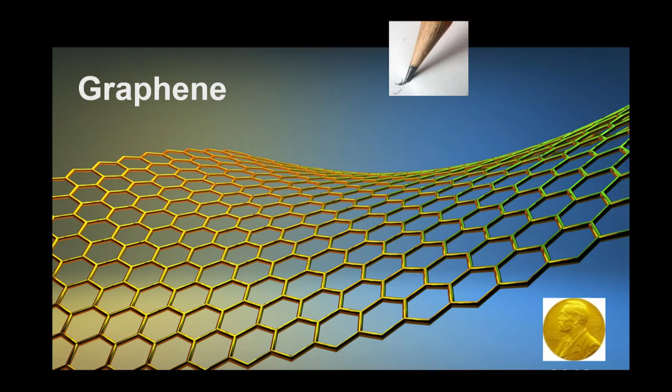So this, if you're a nano person, immediately brings up a question. What does this look like? How small could you get? If you scale everything down, how small is it possible to go in this kind of approach? The answer is, of course, set by the size of atoms. If you scale down to the smallest sheet of paper you can imagine, you would have, say, a sheet of graphene. And recently, there's been a great deal of excitement in doing all kinds of fun stuff with graphene.

It's a very interesting electronic material. It's an optical material, you name it. But it's also just a really robust, nice one-atom thick sheet of paper out of which you can imagine doing the smallest kind of paper arts possible.

And I should also mention that graphene doesn't come in just one flavor. There's a bunch of 2D materials being developed, all of them very old materials being made new again by being explored in single sheet form, all the way from single atomic layer sheets of glass to semiconductors and insulators, and now people are even doing vertical and lateral heterostructures of these materials, making 2D sheets that mix materials, layering them on top of each other.

If you think about this from a paper arts point of view, there are lots of things that you could imagine doing. And so the question becomes, can we do this? Can we do some sort of paper art type three-dimensional structures starting from this two-dimensional material? So that's the question that we've been asking ourselves in my group. We will not fold this for you by the end of this talk, so don't expect it. But we are making a little bit of progress, and I'm going to tell you about that progress.

So first off, you have to understand your starting material. And the first key question is how stiff is it? If I bend it, how bendy is it? Because basically the reason we want to shrink the paper in the Z dimension and make it 1 atom thick is because it needs to stay nice and flexible even when it's extremely small. So how do we answer this question?

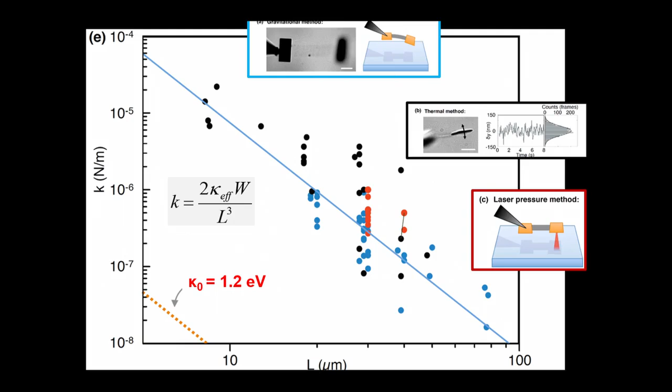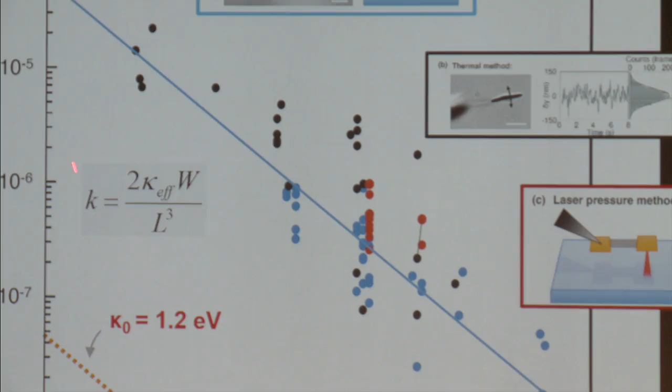Anyway, if we accept we're going to work in water, we can measure, for example, the bending stiffness of these graphene sheets. And this is the spring constant of this graphene sheet. It's a function of how long the graphene sheet is. You don't need to pay a whole lot of attention to this graph other than, number one, we took a whole bunch of data using a whole bunch of techniques. And number two, this is what we got, and this is what we thought we were going to get. And finally, this is a log scale, so we didn't miss by a little. We missed by about 3 orders of magnitude in how stiff the graphene was in comparison to what we thought.

And the answer is it was a lot stiffer than what an atomic scale person would have told you. People know a lot about carbon-carbon bonds. A chemist could tell you what the stiffness for bending carbon-carbon bonds is, but our paper came in about 1,000 to 10,000 times stiffer than what people thought. And so, why is that? It turns out the answer is incredibly simple.

There's the answer. A crumpled sheet is much, much stiffer than a flat sheet. So we thought we'd made that, when in reality we had made that. And since the bending stiffness of a sheet of paper goes like the thickness cubed, if it's crumpled, it basically acquires a thickness that is the size of the crumples, and it gets much stiffer. In fact, we went in and were able to image these crumples by using Newton's rings, a kind of interference microscopy.

So this mottled pattern you see here of the graphene between these 2 pads is due to the height variations of the graphene sheet. Now, I should say we don't know why it's crumpled. We didn't mean for it to be crumpled. We don't necessarily want it to be crumpled, although we don't really mind, but it is. It's another one of these things. First, you got to understand your raw material. And I could give another talk on why it might be crumpled, but I'll save that for another day.

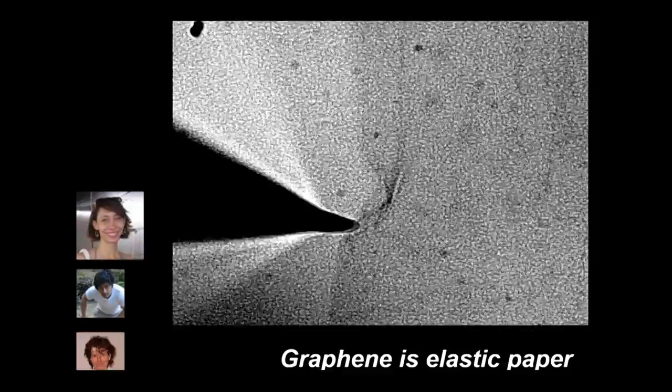But this stuff does act like paper, and in particular, it acts like a certain sort of paper. So this is a graphene sheet that I'm going to push on. And you can see that it will bend and flex like a sheet of paper, buckles and what have you. But it's not quite like a sheet of paper, and you're going to see it's not quite like a sheet of paper in the following way. If you reverse it, it all goes back. It's an elastic sheet of paper. Okay? So that's kind of cool. It makes for a neat video.

It's sort of neat. If you're an origami artist, it's kind of bad, right? Because there's no creases. So we're not going to show you origami because we don't know how to crease an atomically thin sheet of paper. If you do that, that's called chemistry. You would have to go in and modify bonds or something, or start stacking layers. That's also another talk. But there is something we can do in the paper art realm that works perfectly fine with elastic paper that doesn't require creases, and that's so-called kirigami.

So kirigami is origami if you don't have any standards and you're allowed to cut the paper as well as fold it. And once you do that, the world opens up into a much broader space. And in fact, you can make very simple things. Some paper models are shown here, and then realize them in their graphene versions down here. And that's what's shown here.

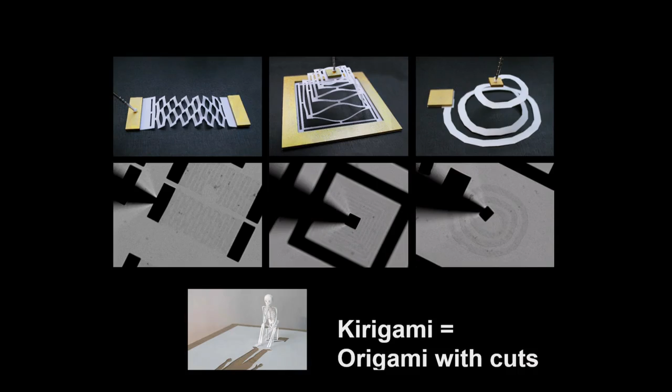By the way, these paper models are not just for visualization's sake. As I told you, everything is scale invariant in this kind of approach. So if you get the ratio of the length to the thickness of the paper right, it'll act about the same way as these models. And it turns out for the size of these things that we're making in graphene, about 10 microns or 20 microns long, the effective length to thickness ratio is comparable to a standard sheet of paper. So we play with the paper models, and that actually informs what's going to happen in the actual microscale system. So that's kind of fun.

So what actually happens, can you do this? Well, I'll just pick out one of them for now. I'll pick out this one here. This is a spring where it stretches by bending, as you will see in just a second. So the paper model, there it is. You can stretch it, and it does this cool thing. It buckles out of plane when you pull on it. Spontaneous symmetry breaking going on. There's all sorts of fun physics there.

But if you ignore all that and just say it's a soft spring, the question is, can you make it out of graphene as well? And the answer is yes. And so you can pull on it, and it stretches just like the paper version. And it's very robust. You can do this as long as you want. You can do it thousands of times, and it will just keep doing it as long as you don't pull it so hard that you rip the thing apart.

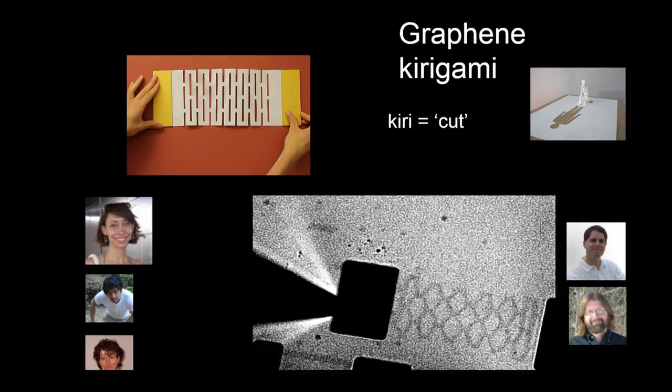It's really quite amazing. And I'll mention, by the way, the spring constants for a spring like this are about 10 to the minus 6 newtons per meter, which is incredibly soft. It's like 1,000,000 times softer than a typical atomic force microscope cantilever, for example. These are some of the softest springs made out of these kinds of materials ever made. So that's pretty fun.

You can also make nice images of these. You can scan the focus of your microscope and really look at the 3D structure of this thing. There's a bacterium or something floating over there.

And you can compare them in some detail to the paper models. This sounds ridiculous, but it's actually useful to do. We do these fancy micron scale optical resolution of these structures, and then we compare them to the paper models, and they do all the same kinds of things. It's really fun. But I'll mention this device is not just a mechanical structure, it's also a transistor.

Graphene is a conducting material whose conductance is a function of the induced charge on it. So we can also attach electrodes to this and measure the conductance through this thing as it stretches. And I won't belabor this point here, but suffice it to say that when we stretch it, the conductance properties don't change because basically the atoms aren't changing. Nothing's happening. It's just sort of changing its form into a more convoluted structure.

But this is very exciting for things like soft electronics. You may have heard about wearable electronics where people want to tattoo really soft stuff on your skin. Think of this as wearable electronics for the individual cell. It's soft enough that you could put it up against a cell, and the cell wouldn't mind it in the same way you wouldn't mind one of these wearable electronics tattoos. So we're looking into that for neural recording and what have you now.

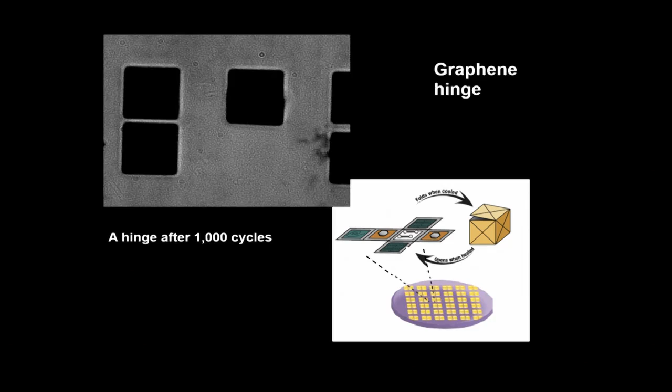And so we're really starting to think about taking these kinds of hinges and implementing on top of the graphene all kinds of functionality that you might find interesting. Then you can fold the thing up, deliver it somewhere, and then have it do something in an interesting environment. So we're beginning to think of graphene or these other 2D materials as a backbone upon which you can put all of your existing technology, fold it up into an interesting shape, and unfold it as needed.

So we're just at the start of this game. We're just beginning to learn how to do this, but we are getting somewhere. And I think over the next few years, you will see more and more of this kind of stuff come to the fore. It's really a great opportunity to try to push all the stuff that you're hearing at this meeting down to the smallest possible scales.

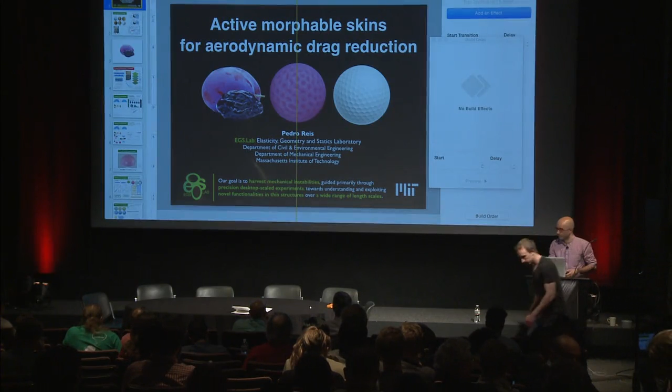I'm afraid you might hear the boring engineering talk now after all these wonderful design talks, but I'll try my best. So in fact, the previous speaker already mentioned the name of my lab. He talked about elasticity. He talked about geometry and scale invariance. And the talk that he didn't give, he said when you crumple a piece of paper, he would have talked about statistical mechanics. And that's the statistics here. And so we look at these kinds of problems as well.

We focus on thin, slender structures where the geometry is scale invariant. And so rather than working at the graphene scale or the kilometer scale, and we are motivated by problems at both of these scales, we scale them down or up onto the desktop and do precision modeling experiments towards predictive understanding. And so the goal is then to harvest instabilities of these structures for functionality.

Now, today I'll be focusing on one single problem where we're going to get inspired by the wrinkling of fruit and develop some precision samples where we can excite these dimpled wrinkling patterns, which look remarkably similar to the dimples on a golf ball. And then we're going to say, wow, this might be able to be used as active, switchable drag reduction surfaces.

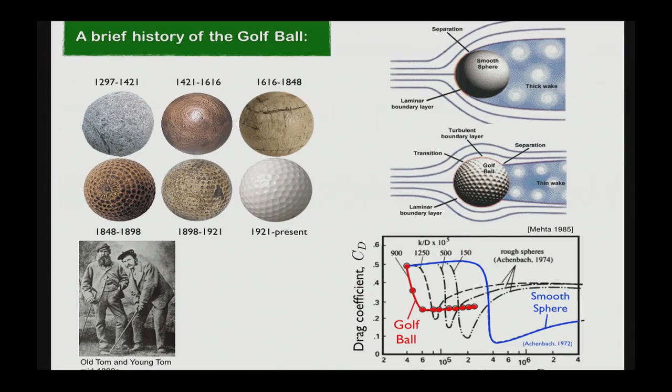And so if the sphere is smooth, the fluid goes around, at some point it separates. And there's a turbulent region at the back that is the source of drag, or form drag, which is different from skin drag for highly streamlined objects. So form drag. Counterintuitively, when the ball is rough, the boundary layer gets tripped from being laminar to turbulent. And the separation point actually occurs later. The turbulent region is smaller, and as a result, drag is also lower.

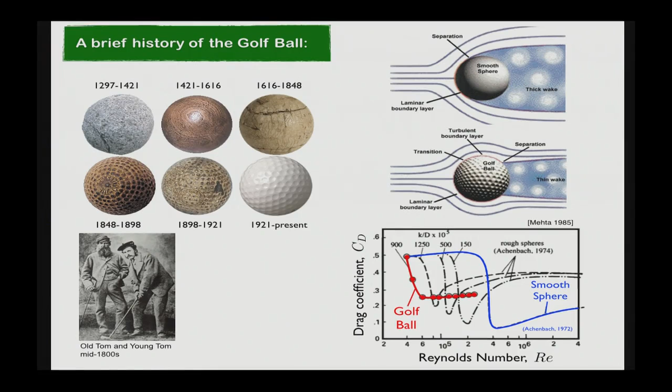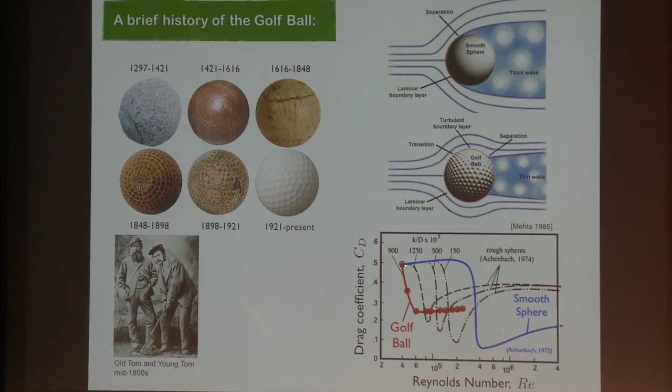So let me take you through these plots. So this is very classic data from Achenbach in the 70s. I'm plotting drag coefficient as a function of Reynolds number or flow speed. The blue curve is for a smooth sphere, so the drag remains fairly high in the range of around 0.5, which can be calculated exactly, over the range for which golf gets played.

By contrast, a golf ball has a drag crisis much earlier, and over the range of golf actually has a lower drag by a factor of 2, so drag is 0.25. And if you play with the roughness of the sphere, you can have a different kind of behavior. So motivated by these, we're now going to exploit wrinkling of curved objects. But before I talk about curved objects, I really should give a little introduction on wrinkling. It might be trivial for some of you in the audience, but maybe not for others.

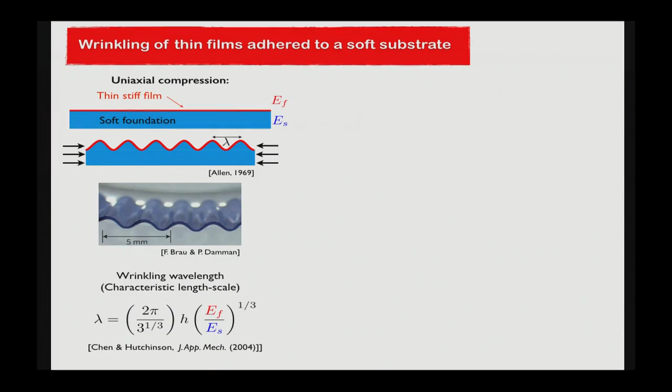So wrinkling is what you see literally when you compress a thin, stiff layer on top of a soft substrate, like skin on top of flesh. And I'm not using technical terms. I don't know them. So we have a thin, stiff film on top of a soft foundation. When you apply a compressive load, the thin film, if it was by itself, would like to go on to the first buckling mode, but it's attached to the substrate, so that would cost too much energy. And instead, there's a characteristic length scale that gets selected, that looks like this in real life.

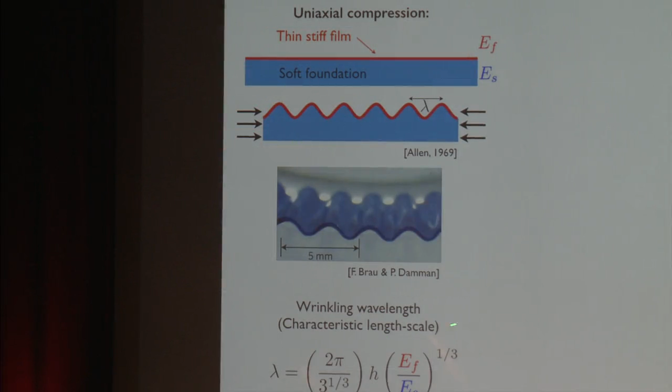It has been calculated exactly, so the solution for wrinkling dates back to the 60s, when people were thinking about sandwich panels in structural applications. And so the wavelength for wrinkling depends on the ratio of the stiffnesses of the film and the substrate to a power of 1/3. It goes linearly with the thickness of the stiff film, and there's a prefactor that can be calculated exactly. So this is for uniaxial compression. When you apply loads biaxially, so you have loads in two directions, you can get more complex patterns.

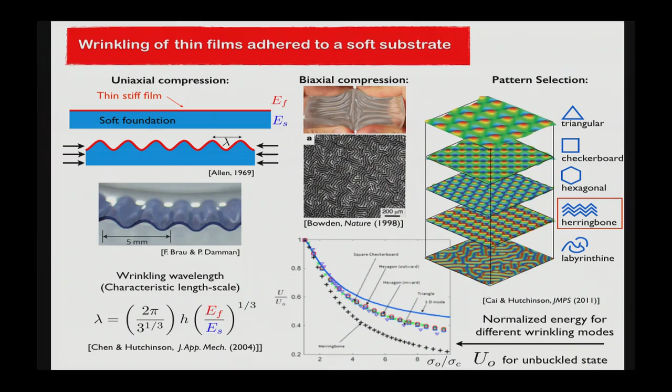And the recent analysis by John Hutchinson at Harvard, in these studies from a few years ago, from 2011, showed that for wrinkling of flat plates on a flat substrate under biaxial compression, there are multiple solutions, but all of these cost a lot of energy, and the one that you're most likely to see is the herringbone or fishbone kind of pattern. So keep this fact in mind because we're going to revisit it later on.

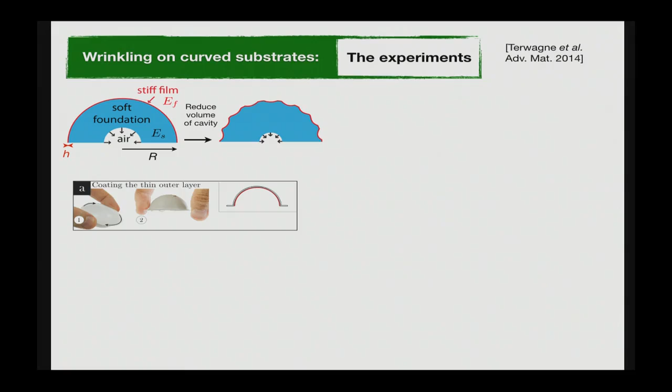Okay, so we wanted to look at wrinkling on curved surfaces. So the research question is, how does the curvature of the underlying substrate affect what we know about wrinkling on flat systems? How we make these samples is kind of interesting. We do not use bacteria, unfortunately, but we have a thin, stiff shell on top of a soft sphere with a cavity. So think of it like an avocado. You have the green, thin stuff on the outside, and then the stuff that you eat and the bone. You get rid of the bone, so you have a cavity. And we're going to depressurize this cavity in order to apply compression.

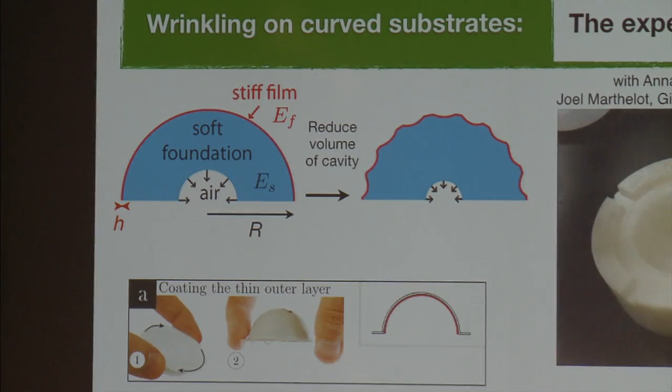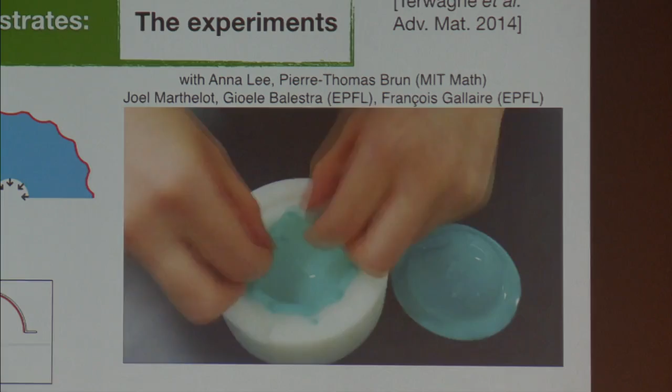Just a little aside. This actually turned into a project of its own. How do we even make these thin shells, which are not graphene thickness, but you also cannot make them by casting? We use a coating method where we pour these polymers over a curved surface. They get thinner because of drainage, but there's a magic balance between gravity, polymerization rate, and viscosity, such that the thickness that we get is constant within 5%. It's magic. You'd have thought that the top would be thinner than the bottom. That's not the case. And so we can actually design for shells of different thicknesses, and we know how it depends on viscosity, on the radius, on the curing time, and so on.

Anyway, knowing how to make these things, we can now tune parameters for the shell and for the core. We work over a range of stiffnesses over a factor of about 100. And when we depressurize these samples, they switch instantaneously, so this is not through swelling, it's through pneumatics, so they're fast, and we can excite these dimple patterns. And this is where we saw the analogy, there might be something here that connects to golf balls. But before we get there, let me briefly tell you how we can tune parameters in order to get different patterns.

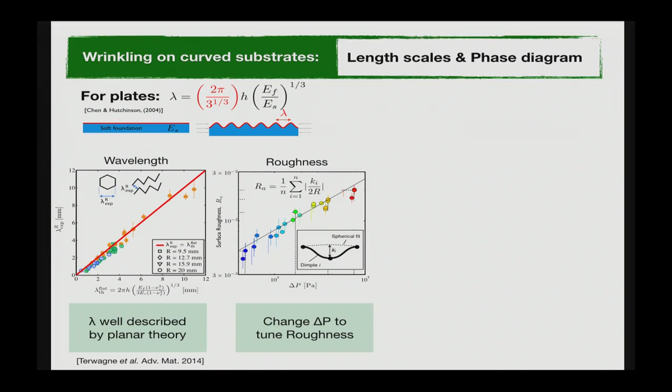So first of all, if I plot the wavelength that we get in our experiments as a function of the prediction for flat plates, you have a y equals x line. So basically what we get on our curved system for the wrinkling wavelength is exactly the same as what people have calculated for flat plates. So that was a bit of a disappointment. On the other hand, we now have a design guideline. If you want dimples of a certain size, we know how to get them.

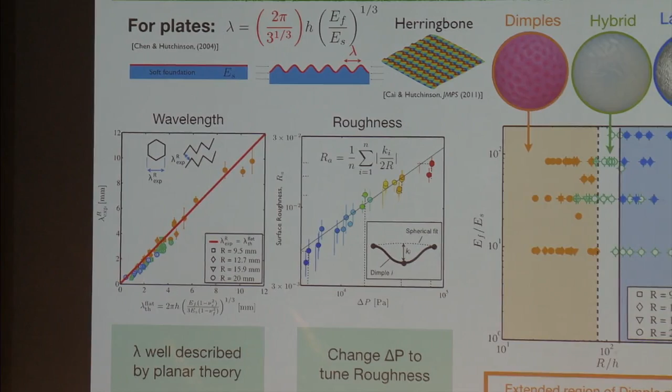Now, these crystalline dimple patterns would not have been easy to see at all, other than in a very small region of parameter space for flat systems, and here they're very prevalent. So if I plot a phase diagram with ratios of stiffness between the film and the core as a function of the ratio between the radius of the sample and the thickness of the shell, there's actually an extended region over which we see dimples. So curvature is modifying the pattern that is getting selected.

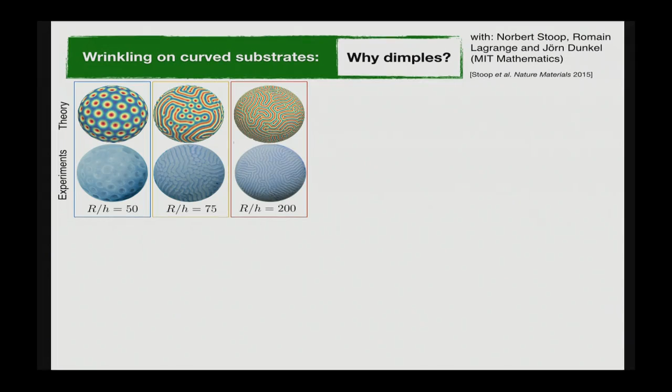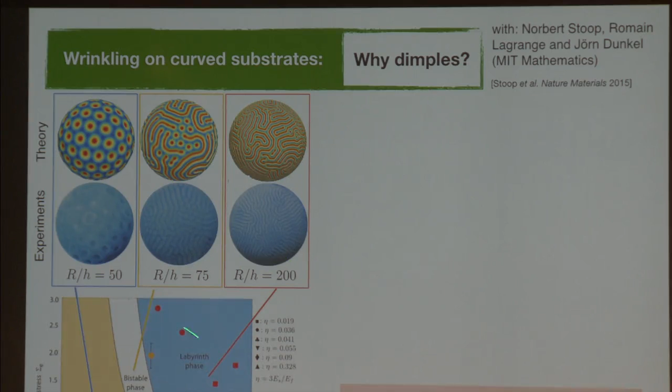Now, this is probably the slide with the largest number of equations in the conference, so I apologize. But first, let me give you the results. So the question is, why do we modify the result that we obtained for the flat case? This is work done in collaboration with Jorn Dunkel from the math department at MIT, again with two wonderful postdocs. They really developed this model. These are our experiments, so we can get either dimples or an intermediate mixed phase or labyrinths, and they can predict that exactly. This is the same phase diagram that I showed you before. So now we can put theory on top of experiments, and theory lines very nicely separate the various phases. So we have predictive value here.

And I think I'm actually going to skip this, since I'm running out of time. By the way, the kind of mathematics that goes into describing wrinkling of this system is very, very similar to Rayleigh-Bénard convection that happens when you heat up a cold fluid on top of a hot fluid. You get these vortices, and you can develop patterns that way, so it's essentially the same mathematics.

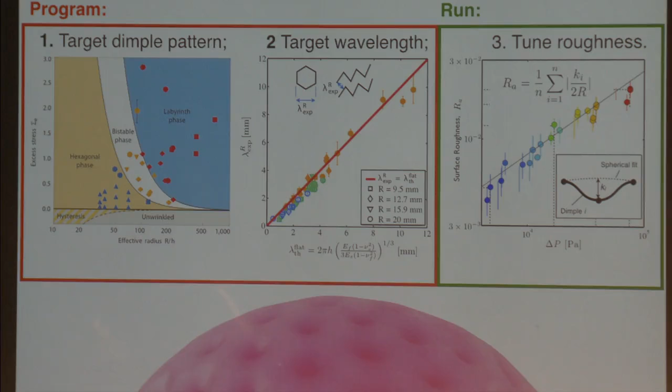And then I can run my program, meaning that here I'm plotting amplitude of the dimples as a function of depressurization. And so I can target a certain amplitude for the dimples on demand and in a nearly instantaneous manner. So this is where the analogy now comes in. So we know how to design the thing on the left, and we want to see if we can do something with the thing on the right.

So we took our Smorphs. By the way, we call these things Smorphs, smart morphable surfaces.

So not Smurfs. Smurfs, apparently, they never wrinkle. So I learned. I had a Belgian postdoc who knew about all of comics.

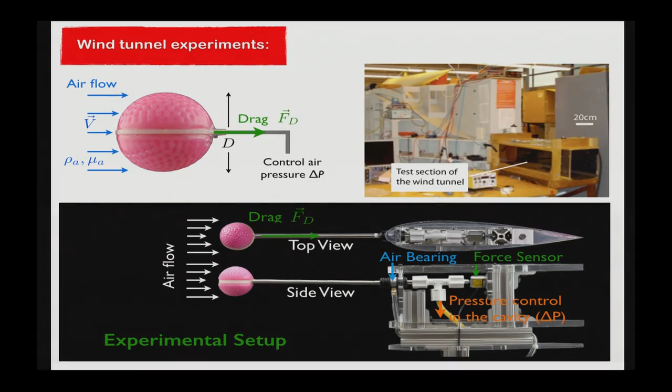Anyway, we took our samples for a test ride in the wind tunnel here in the AeroAstro department. Our setup allows us to, so we have wind blowing from left to right. These are our samples. They are connected to a vacuum chamber here, a depressurizer, through a hollow pipe. They are held by this air bearing. And so this is the T-splitter that connects to the vacuum chamber.

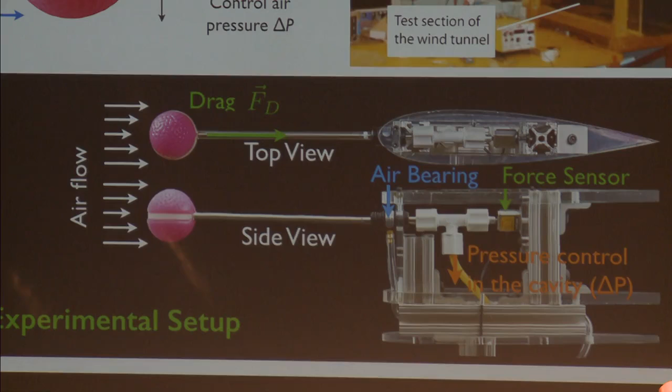And then we have a force sensor here that allows us to measure the force that the wind exerts on the ball. So we can measure the drag force, from which we can calculate the drag coefficient. It is defined like this, so it's just the drag force divided by a bunch of things. Reynolds number is identical to saying how hard I'm blowing with the wind tunnel.

So let me answer the first question already. What could this be useful for? So we might envision designing structures that are coated with this smart surface that could have a lower aerodynamic drag. This could be beneficial under storm conditions, for example. So we might think about affecting the boundary layer next to the wing, the airfoil of an airplane, perhaps to change drag and lift.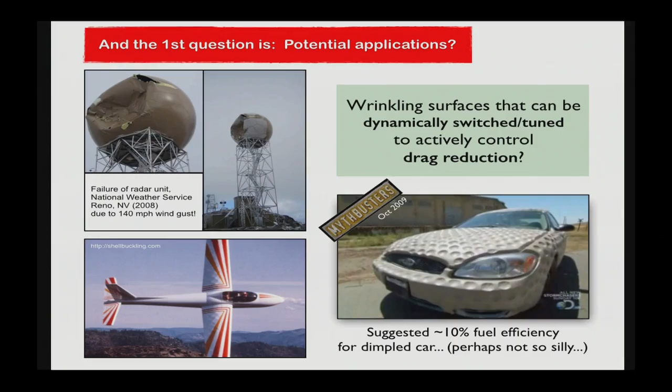An even more concrete application is perhaps to play with a region where the flow separates from a car, and we might be able to reduce drag in these structures, therefore increase fuel efficiency. And in fact, this sounds silly, but Mythbusters, which is very serious, actually went and checked this out. So they cast a car with all these dimples, and they were able to show that they could reduce drag, they could increase fuel efficiency by about 10%.

However, they had no way of knowing what dimple size to optimize for and so on. And so I think with our design tool, we might be able to get there. And we're actually currently actively working with one of the leading car manufacturers, but I can't really tell you too much more about that.

At lower wind speeds, the rougher the ball, the better. So what having an active surface might allow us is that, depending on the wind conditions, we're able to actively tune on demand the roughness of our surface. By knowing where you are, we can actually ride the surface of minimum drag. So you're able to get the surface with lower drag by being active than any other static surface. And I think this is exciting, and we're very actively pursuing this right now in our lab.

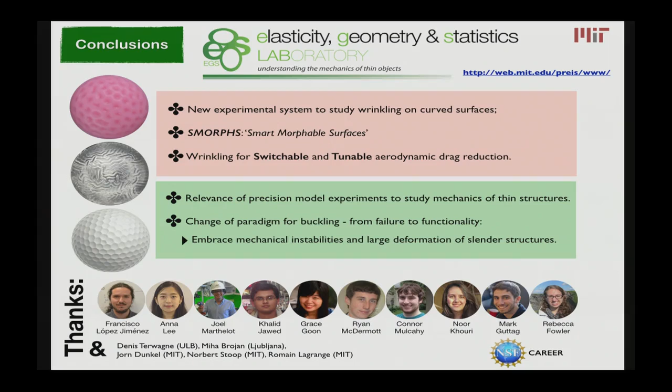Okay. So to conclude, I told you about these experiments in a scaled environment at the finger scale to explore the mechanics of thin structures. And I gave you this simple example of wrinkling on a curved surface. So curvature comes in and affects the process. I introduced you to this concept of SMORPHS, or smart morphable surfaces, that can be exploited for switchable and tunable aerodynamic drag reduction. And this was just an example of one of the things we're doing in our lab.

In a number of other problems for plates, rods, and shells, we're employing the same mindset of doing very precise experiments at the desktop towards learning the underlying mechanics that we can then exploit as design guidelines for either very large length scales or small length scales.

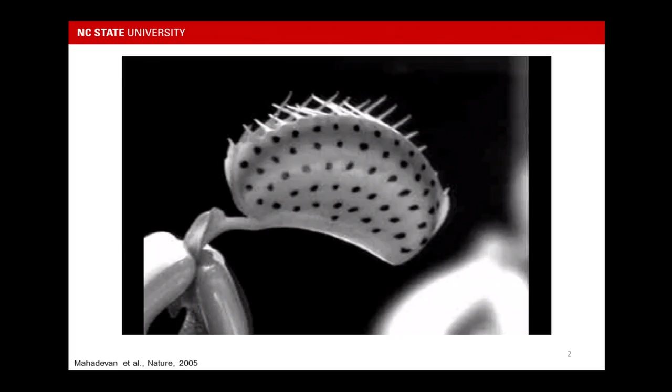So first, nature actually already demonstrates a lot of amazing plants or living animals that are shape programmable. You probably saw some of these examples this morning, and also a lot of DNA programming this afternoon. So here is another example, the plant called flytrap. This is taken by high-speed cameras. When this plant gets some stimuli from the environment, it will change its curvature, and eventually it will fold up and close to trap maybe a fly inside.

So in our group, the materials we are interested in, which can realize shape programming, range from liquid metal and hydrogel to shape memory polymers, from the nanometer scale and micrometer scale to the millimeter scale. So the first thing I want to talk about is self-folding strategies, which I'm working on co-advised with Professor Jan Genzer in our department. We're interested in converting 2D patterns into 3D structures by self-folding, because it can be compatible with a lot of conventional 2D patterning technologies.

So here is an example. I actually brought some samples with me. What we use is this flexible, transparent polymer sheet. We use just a regular printer to pattern this black ink as a template on the polymer sheet. In this video, I will show you quickly. This is a template we cut out from these materials. Sorry. After exposure to an IR heat lamp, you can see it folds directly into 3D structures in seconds, hands-free. The point is that the printed black ink pattern selectively absorbs the light and converts it into heat to locally heat the polymer, causing shrinkage.

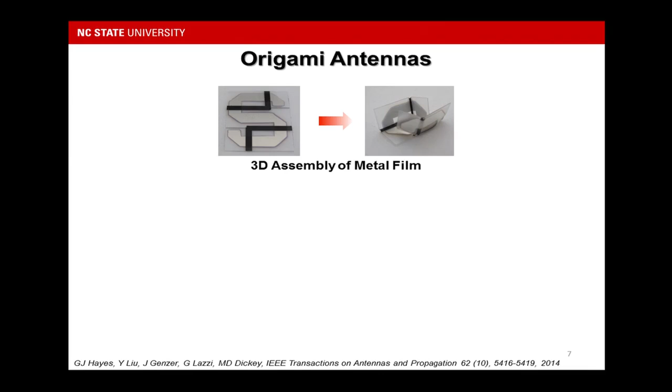We are also interested in seeing how we can use these 3D structures or the self-folding method to produce functional devices. So we did a preliminary test patterning metal film on these 3D self-folding structures. And we also collaborated with electrical engineering at NC State to build a prototype antenna. You can see we simply pattern this copper foil on the self-folding structures. After exposure to the IR heat lamp, it will fold.

By characterizing the antenna's properties, you will find the signal for the antenna actually shifts. I will not discuss the details of the data, but the point here is it can potentially be applied to some sensors or other reconfigurable devices.

Then you might think about whether this method can be applied in other ways, for example, changing the light source, ink absorbers, or different materials. Actually, that's one thing we're interested in exploring. So one example: instead of using an IR heat lamp, which you can find in McDonald's or your bathroom, one thing we use is laser folding. We collaborated with an optical group in electrical engineering.

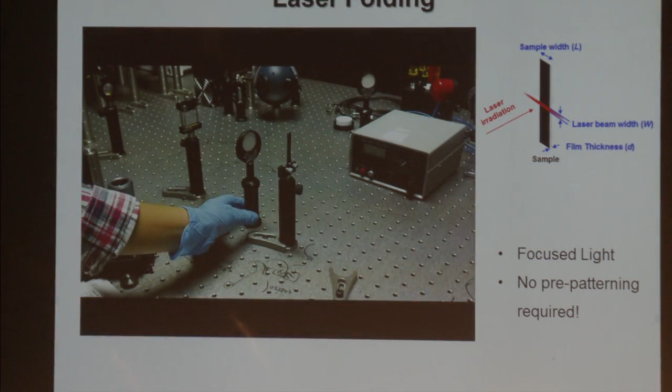So this is basically the setup. All these lenses convert an IR laser from a spot to a linear pattern, as illustrated in this cartoon. After I remove this block, you will see these black coated shrink films actually bend to 90 degrees in seconds.

Compared with the original IR heat lamp and black ink, the cool thing is there's no requirement for pre-patterning the hinge on these materials. The people in electrical engineering are able to program the path of the laser light. So in that case, you directly program the laser light so you can predict how the hinge folds.

Another thing is ink absorbers. We're using regular black cartridge ink, but you can think about other possibilities. One thing we're thinking about, relevant to today's talk and also interesting, is microwave heating. This work has been done by a grad student in our group. The basic idea is similar. We're using screen printing to pattern graphene ink on these same materials. By applying the microwave, you can also realize local heating of these materials to cause the folding.

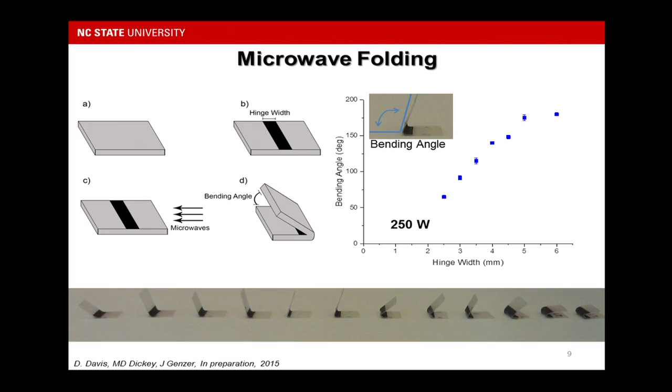I want to mention that we tried powers from 40 watts to 250 watts. Just to remind you, a commercial microwave in your kitchen is about 700 to 900 watts, so this is quite low. And although I don't have a video showing it here, the folding actually happens at room temperature in seconds using this low power. And similarly, hinge width can control the folding angle.

I mentioned that this material is biaxial and commercially available. So we thought, what if the pre-strain is unsymmetrical? What about a uniaxially pre-stretched polymer sheet? You will find some very interesting phenomena different from the previous shrink films I showed: the behavior depends on the strain direction. For example, for this demo we simply used a Sharpie marker to draw the black hinge. If it's perpendicular to the strain direction, you get sharp folding as well.

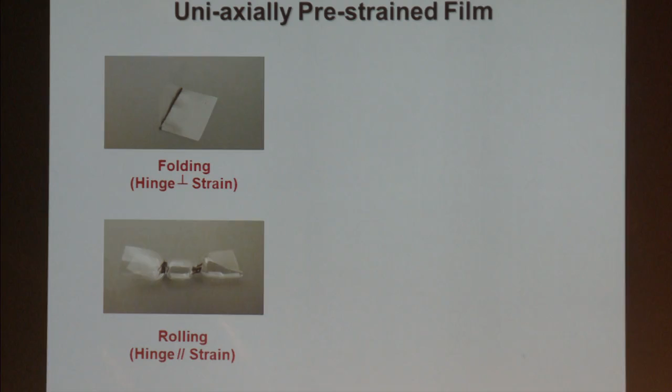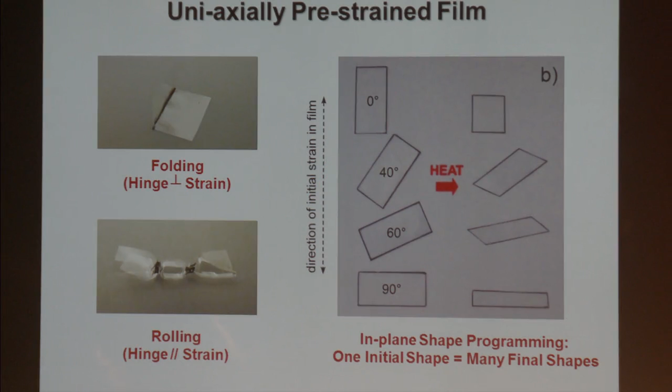However, if your hinge is parallel to the strain, you form these rolling structures, like candy wrapper shapes. Although we are interested in fabricating 3D structures, these materials are also cool for realizing 2D shape programming. Because the strain is only in one direction, it's not symmetrical. Depending on how you cut the polymer sheet relative to the strain direction, you can achieve different final shapes. This may be applied in the future; we propose some interlock structures, or you can think about applying it to other materials.

Like a lot of the great talks earlier about design, our team is also diverse. As I demonstrated, we collaborated with electrical engineering, and we also work with mechanical engineering to study mechanism models of the folding process. We also work with the College of Design at our school to study how to combine self-folding strategies with textiles or fabrics to form interesting design structures.

Another thing is we collaborated with some local high schools to educate high school students, and we've done a lot of demos and outreach using self-folding to educate middle school students. Actually, this afternoon there's Nano Days on our campus, so I cannot join it.

Besides self-folding, the second thing I want to talk about is a really cool idea in our group, which is liquid metal. As you might know, in the periodic table, gallium has a melting point near room temperature.

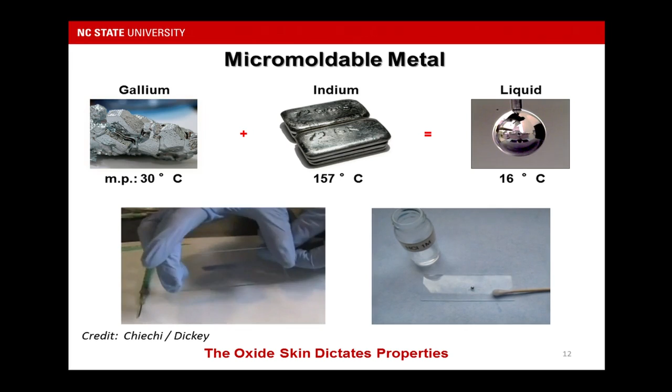One thing we can do using this liquid metal is 3D printing. As you see here, we can 3D print these liquid metal droplets. This is actually the oxide skin. Because this skin has enough mechanical strength, it can hold these structures stacked on each other to build up different 3D structures.

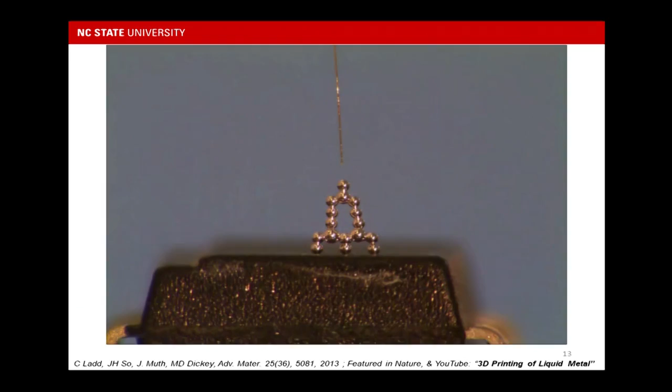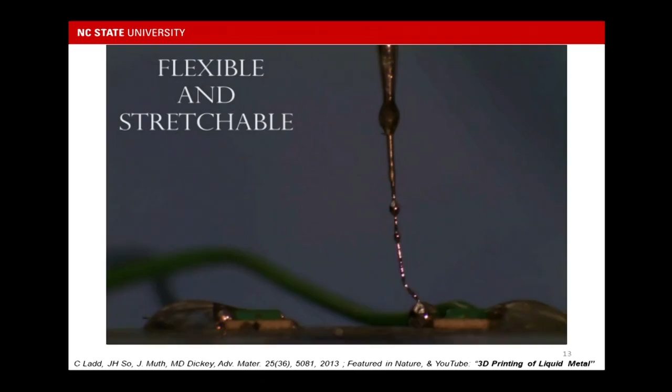Now you can think about combining this 3D printing with other materials, since it can be done at room temperature. In that case, you can come up with many other cool ideas. The students spent a lot of time building this stage. Besides droplets, you can also build wires. Since it is flexible, stretchable, and conductive, it can be used as an interconnect.

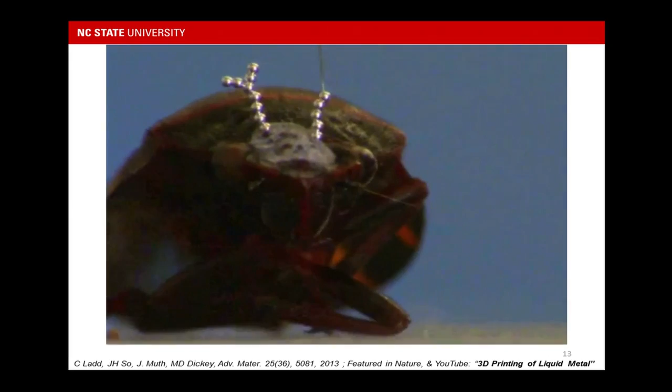Accidentally, there was a dead bug. We didn't kill it, but the student decided to do a simple demo on it. Although there's no real function, it shows how, yeah. Personally, I'm scared of these kinds of bugs.

But it shows how small the scale is and how gentle the process can be. You can find this on YouTube.

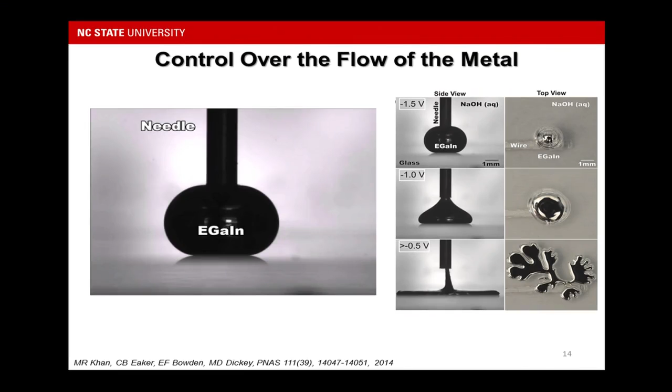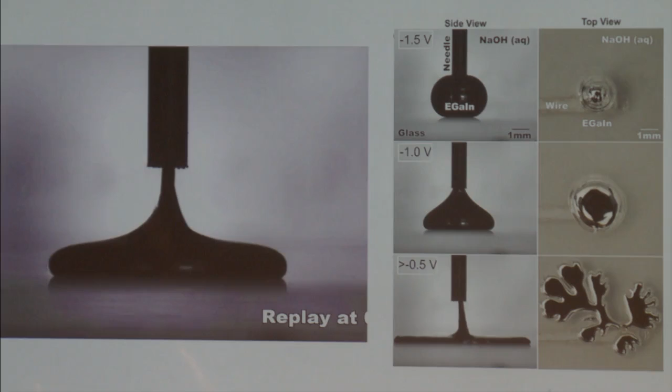Another thing is you can control the flow of this liquid metal by applying voltage in the electrolyte, due to some electrochemistry. I won't go into details, but I want to show you this video. By applying a small positive voltage, this liquid metal goes instantaneously from a droplet to this pancake shape, which implies that the surface tension has dramatically decreased. We propose that is because the oxide skin starts to behave like a surfactant to lower the surface tension almost to zero.

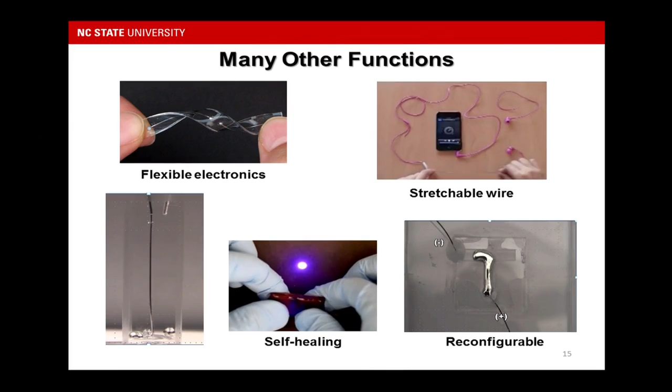There are many other applications of liquid metal since it's flexible, stretchable, and conductive. You can also apply it to other reconfigurable devices.

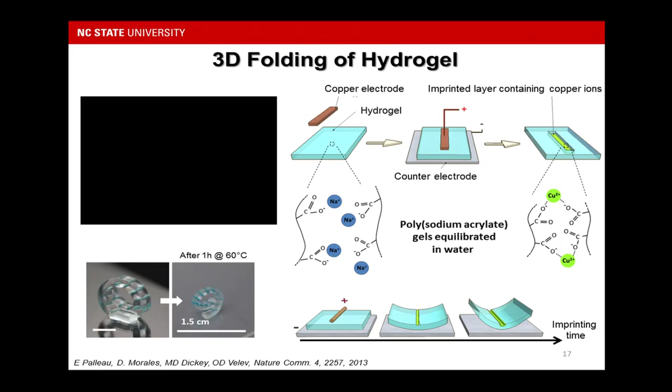Just to remind you, our group is interested in shape-programmable materials like liquid metal, hydrogel, and shrink films.

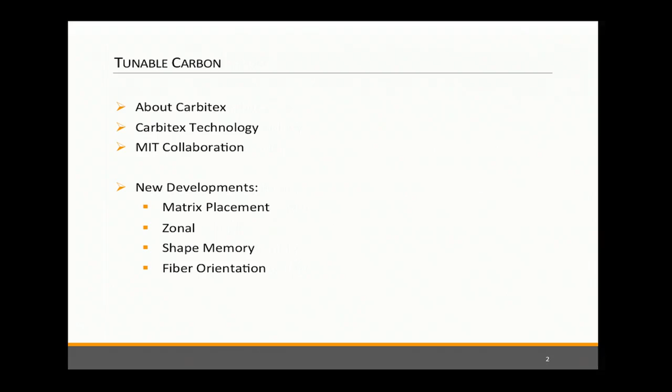My topic today is tunable carbon, specifically how it relates to material transformation. I'll give you an overview of Carbitex, our technology, our collaboration with the Self-Assembly Lab at MIT, and then some new developments in matrix placement, zonal composites, shape memory, and fiber orientation. The theme throughout is bridging the gap between research and mass market application.

So Carbitex is an advanced materials company that focuses on the development and the manufacturing of flexible carbon fiber composites. And we do this at our facility in Washington State, where we have a development lab, analytical and testing lab, and manufacturing capabilities. Our development lab really focuses on the development of matrix materials, as well as various processing techniques that we develop in-house or are variations of coatings, laminations, impregnations, and curing.

And our testing lab is set up for a host of mechanical testing capabilities, as well as product lifecycle capabilities, because we're a company that focuses in consumer goods as well as the industrial and commercial market. And our production facility is set up in a way to mimic a larger scale of our lab capabilities.

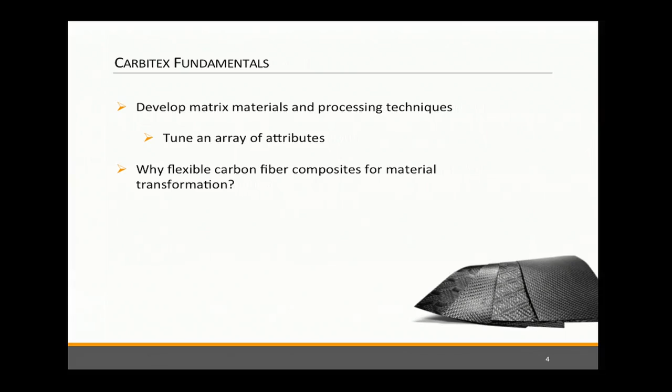So really, what's the difference between a traditional carbon composite and a flexible one? Essentially, flexible carbon fiber technology is unlike traditional carbon fiber composites that are limited in the bending radii for very thin laminate layers, where exceeding that bend radius results in resin and fiber breakage. So the key to our material and our technology is the very low shear modulus that allows compliance at the interface between the fiber and the resin.

And this low shear modulus with a high elongation relieves the cracking and bending failures in traditional carbon fiber composites. Yet the carbon fiber tensile properties remain similar to traditional composites, since less than 10% of the resin strength contributes to the overall tensile strength of the composite. So as I mentioned, we utilize a variety of techniques to customize and tune flexible composites to harness carbon fiber's tensile strength in a flexible form. And you'll see it makes it really conducive for material transformation.

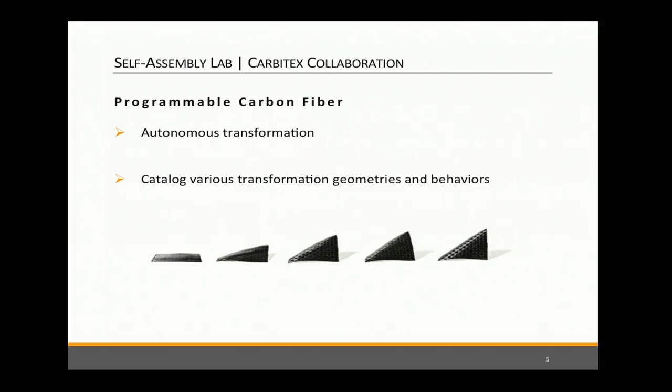So just to touch quickly upon the work that was a phase 1 in collaboration with the Self-Assembly Lab, where we tuned carbon fiber in terms of stiffness and flexibility. And Skylar and Athina at the Self-Assembly Lab were able to print a heat-activated polymer system onto our carbon in various patterns and orientations in order to induce a very predictable and controllable change in the material.

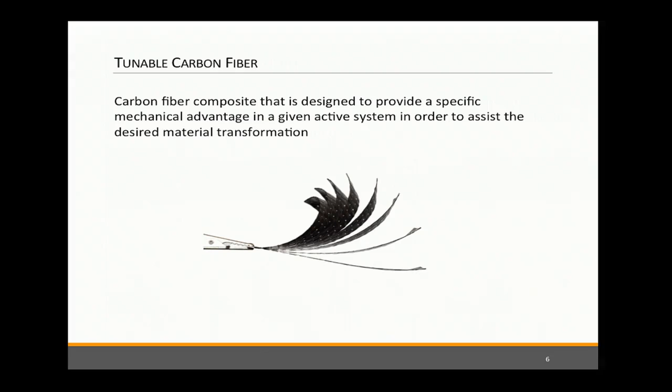So what is tunable carbon fiber, and specifically relating to material transformation? It's a carbon fiber composite that is designed to provide specific mechanical advantage in a given system in order to assist the desired material transformation. And we'll talk about now just a few different ways that we're able to do this. Once again, not just in a lab setting, but we're looking to scale into a production setting for some applications.

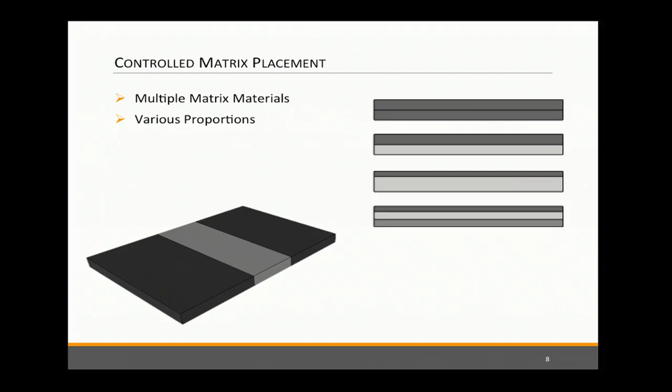The third, two different matrix materials impregnated at different proportions, and the fourth, three different matrix materials impregnated in different ways. And with this, we can really control the symmetry of the material, making it more or less susceptible to transformation in different areas. We're also scaling up to be able to produce these in mass scale.

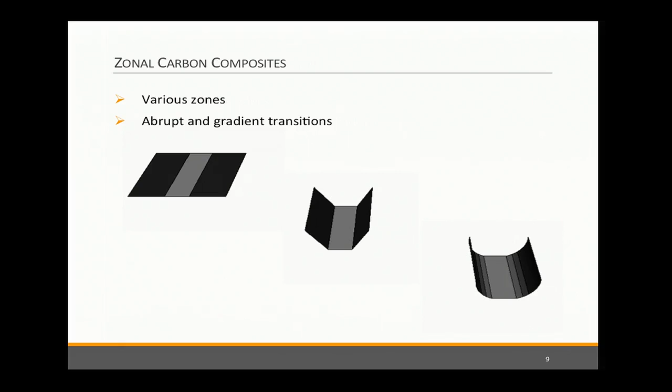So, zonally impregnating or coating carbon fiber, so we can have live hinges and do it in an abrupt change or in a gradual change to invoke more of a curling effect. This one's a little bit more exciting. We're now able to go from a sheet form into a preformed piece of carbon fiber that we're then able to flatten out, and then once the tension is relieved, it can pop back into a certain shape.

And once again, this is work that we're looking to continue with Skylar and Athina in the Self-Assembly Lab, where they can use different active systems in order to evoke a change given a stimulus versus what this example will be. And so just to show the example, we formed a cone with a flat nose out of carbon fiber and a cured epoxy system, a resin system. And then we flattened it out on a vacuum table and put just a thin sheet of polymer on top.

Or not. If my mouse will appear. Yeah. Okay.

So we relieve the vacuum fairly slowly just to show the transformation, but if it was completely removed, it would have happened quicker. So once again, potential uses: flat packing goods, and just different, more exciting applications in terms of the performance side of things.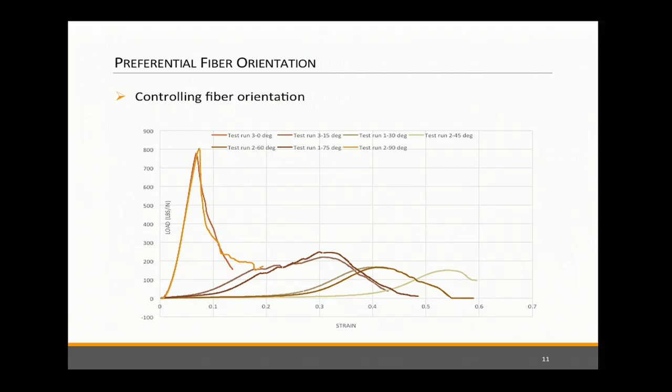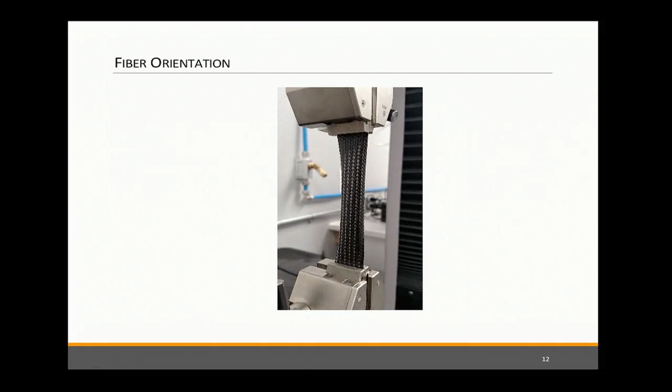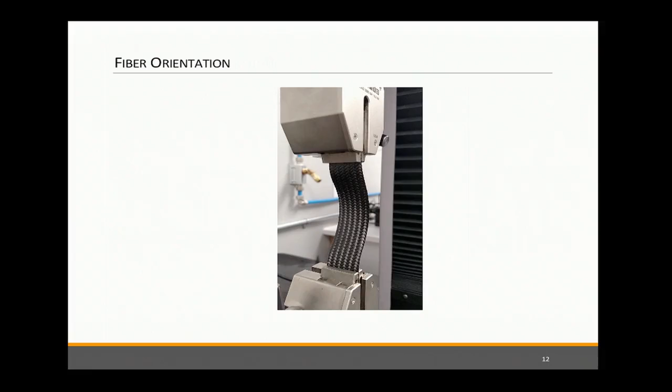This next is just an example of that. As you'll see, we just have a material cycling back and forth. And once again, the idea is to be able to then incorporate an active material in the system so that it can happen in situ in whatever application we're talking about. So once again, carbon fiber doesn't have any real elongation to speak of, and so of course this is just the matrix-dominated elongation.

So kind of back to just this first slide, and I'll wrap up here. My hope is for us to continue to pursue unique technologies that are coupled with our flexible carbon fiber technology, to enable that conduit to mass market as soon as possible. There's always that question of, well, how is this technology applicable? And our hope is to make it more palatable and tangible for companies.

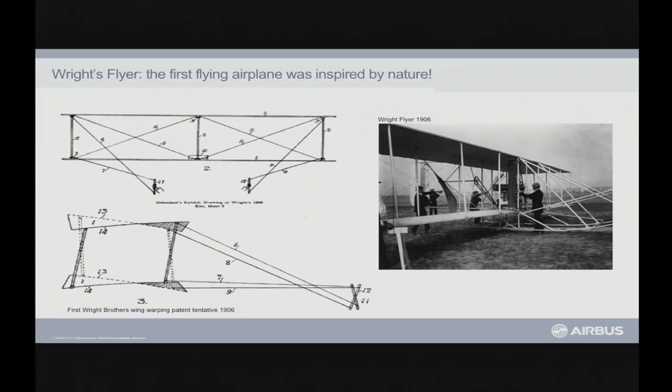First of all, the wings are mimetism from the wings of the birds, of course. But even when we come back to the early age of the aircraft, to the Flyer, the Wright brothers used the warping of the wing to control the roll of the aircraft. So it's typically something that was copied from what they observed in birds. Today we don't use this kind of system anymore because our aircraft are heavier and heavier. So the materials are stiff and it's not possible to modify the twist as they did.

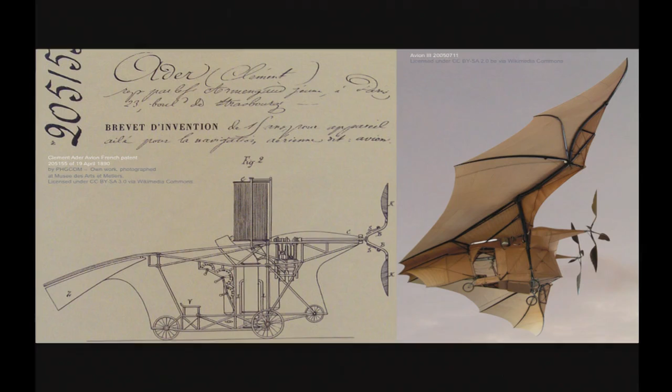But biomimicry on aircraft is not just copying nature. If I take another example, it's not a picture from the last Batman. It's a very old aircraft from the 19th century from Clément Ader called Avion. This aircraft really looks like a bat, but it was not a good aircraft. It did not really fly. Why? Because it suffered from large drawbacks in terms of flight dynamics. So even if it looks similar to nature, it does not mean that it works.

Why? Because biomimicry means first to observe a phenomenon in nature. The second, which is important, is to understand the physics behind it. And the last one is to identify the process and the materials that will allow you to reproduce this phenomenon at the scale of an aircraft. It's something that was not done here.

I can show you an example of what we are currently doing in Airbus, and in other aircraft manufacturers also, which could be a good application of biomimicry: what we call the riblets. It comes from the observation of sharks. Sharks are swimming very fast in the water.

And they consume less power than could be expected by the application of the simple hydrodynamics equations for their movement. And the reason is coming from these microstructures on the skin here, which interact with the vortices created at the contact between their skin and the water.

So we observed that. It was explained by aerodynamicists, and we reproduced it on an aircraft with a similar structure, which was installed on the wing, on the tails, on the fuselage, on several parts of the aircraft. And it works. You have a huge benefit on drag and consequently on fuel consumption if you use such a system. Now we are on the last step: how to install that on aircraft, ensure its maintenance, ensure it will resist water, ice, sand, and so on. But it's really an application of biomimicry.

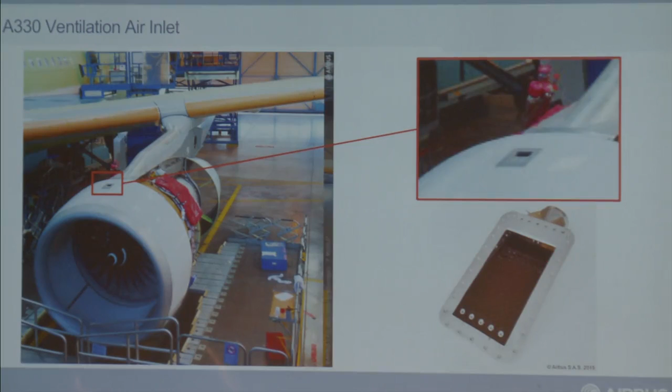So we thought about a simple application using the usual way we work. Instead of having something completely fixed, we created a prototype here with a scoop, which is a stiff carbon plate. And we use the Bernoulli principle. Bernoulli tells us that when you have a variation of speed, you have a variation of pressure. So if you don't have the same pressure on the two faces of the scoop, you create a suction force that modifies the position of the scoop. So that's what we did. We did wonderful simulations. In simulation, it works perfectly.

And we put the system on the aircraft. And on the aircraft, it does not work. It does not work because the condition is always perfect when you are in simulation; when you are in real life, the air around the aircraft is not perfectly stable. You always have some leaks on the lateral side of the plate because you can't have perfect control of the distance between the case and the plate, and so on and so on. So it does not work. And the consequence is that the plate is going into vibration. So it definitely does not work.

So the idea behind that was to say, OK, why not ask the plate to go either in closed or in open position, and that's all. We do not want to authorize it to go into an intermediate position. It's typically what we could do with programmable material. I asked the question to Skylar, and he came back to me with this sample. So you have it bigger here. It's typically a carbon plate which was provided by Carbitex, with some additional printed parts here, which is on the wrong side. It's funny. And the consequence is that you can have only two equilibrium positions on this plate, thanks to the system. So intermediate positions can't be balanced.

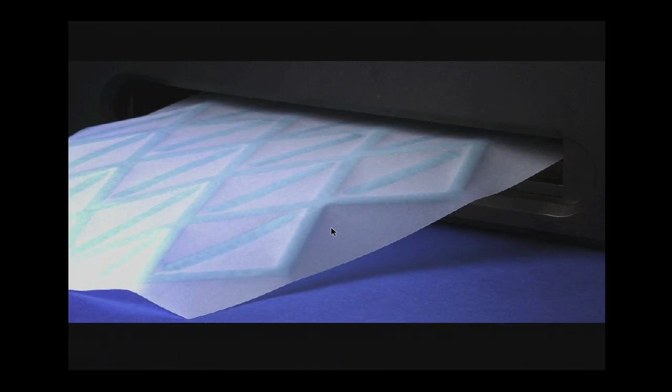There is no sound. First, I take my computer and I just design some lines in InDesign, the really basic software. You can see the cartridges where I just put some tap water inside. And after that, when you print on the paper, the fibers of the paper will start to dry after 3 minutes, and the paper starts to bend by itself.

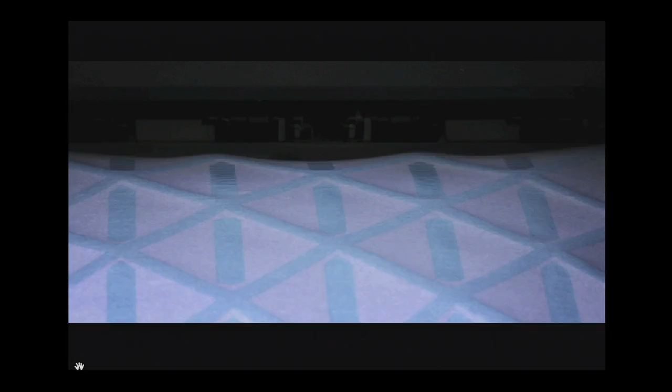Of course, we can print on both sides. And yeah, after that, you just have to wait, and the paper moves by itself.

An interesting thing for me was also to work on the curve. That's something, and maybe Erik can say that, it's quite hard to make a curve by hand. I also work on the large scale. It's approximately 80 centimeters high. I don't know how many inches, but something like that.

And because I'm a product designer and product designers make chairs, I tried to make a chair too. And yeah, the failure was the chair, it's only like that, but I continue to work on it.

An interesting aspect for me is the production process of making an object. By water printer, we can imagine shipping an object flat, and the last step of creating the object will be done at home. When the user opens the packaging, the object can fold by itself.

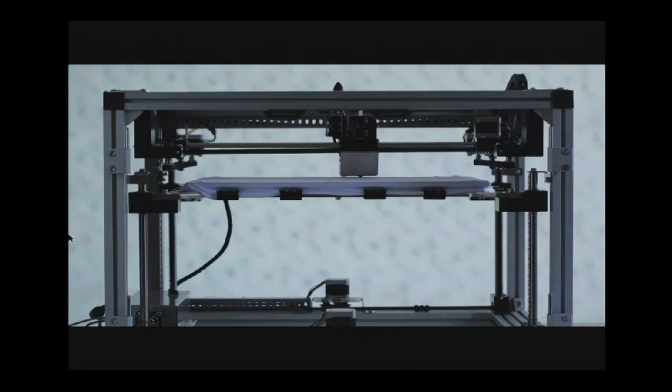Another project: I love the idea that you can just bring a process and try to do another thing with it. We tried to print on textile with the 3D printer. We just stretch the textile and we print on it. And when you release the textile, the shape starts to form and to fold. That's also a really interesting thing in terms of product. You can imagine shipping flat and the object emerges.

Now, what we try to do in this office is to play between the left side and the right side, meaning between the product and the research. Actually, many companies are asking if we can design an object and ship it by internet. That seems to be quite the trend in Europe actually. And I think it's a good opportunity to work with this kind of technology.

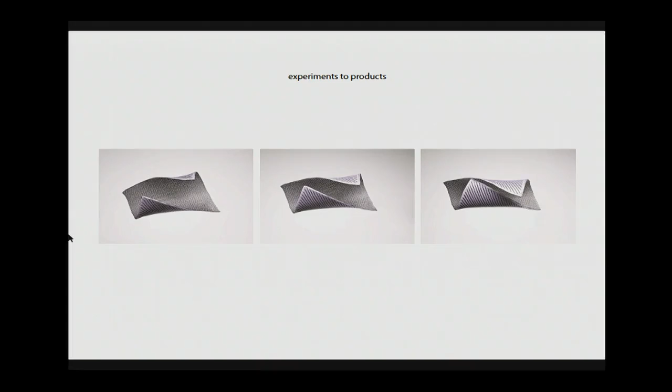We currently work on a chair where we can imagine stretching the textile, printing on it, and when you get it home, you release the textile and the shape of the chair emerges. As a designer, I think it's also important when you use this kind of technique, for example the textile, that you use the textile also for its other properties, let's say for comfort and for the flexibility of the chair too.

We work for a light company, and the idea of this project is really new. You can play with the intensity of the light, depending on how much the textile is stretched.

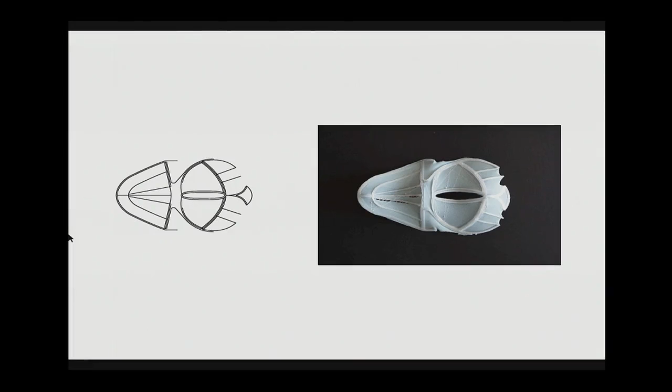We work for a shoe company and try to mix some different material with the 3D printer and print on the textile. There is a lot of different textile, and when you 3D print on the flat, after that, the shoes can fold by itself.

Another thing could be, and we try to work on that with Skylar, an active textile, and that we can imagine the shoes can retract around your feet and just become the perfect ergonomy. That's everything become to change my vision of making a product and can just change the way how we can have a size like, let's say, the commercial size M, S, XL, and some other size.

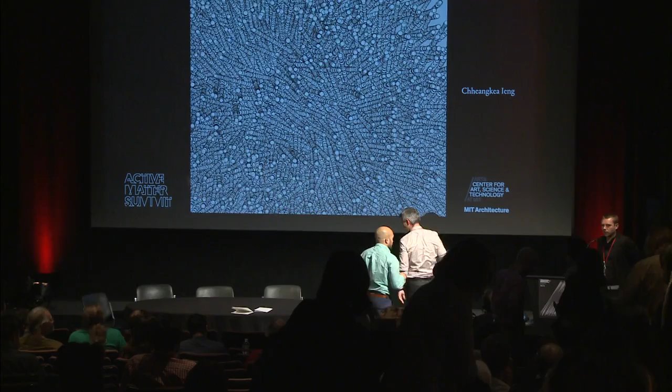So I guess I'm a bit biased in this session, given that we're collaborating with many people here. So I'll try to be a bit agnostic. But what I found quite interesting in the session is the transition from the beginning to the end, hence the research to the application. And often talking with lots of my colleagues, both in academia and outside, there seems to be this constant tension where the academics think we shouldn't work with industry too much because we're going to be way too applied. We're going to be pushed to this spectrum where we lose our freedom. We're going to be really focused on solving incremental problems.

And the other side, industry looks at researchers and said, you guys take way too long. How long is it going to be to implement? You guys are crazy and irrelevant. What are you talking about? And both directions are totally wrong or can be wrong. And so what I'm really interested in is how we can find useful intersections.

And I guess I would pose it to you guys to think about what can we dream of as the ideal intersection of those? How do those two collaborate so that it doesn't take forever and that we aren't producing just totally irrelevant things, but industry isn't also pigeonholing us? And I hope what was shown was kind of an opportunity to see where it's been super useful from our end and seemingly useful from the other end. But maybe we can talk about that. Do you guys see any ideal opportunities there to collaborate on industry and academia?

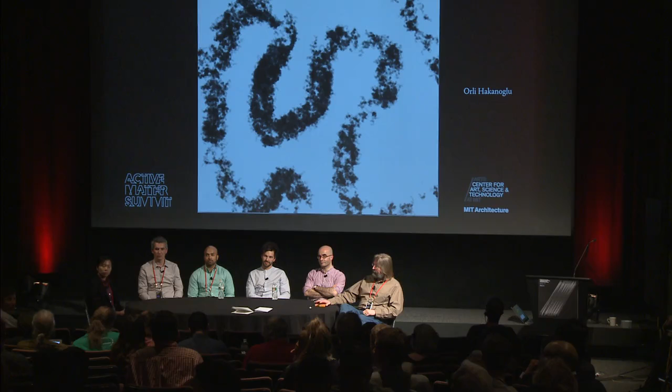Maybe just more an observation rather than a question. Particularly in contrast with the last session, it's really clear that in this session, you focused not so much on the material itself, but really on geometry, right? And so when Skylar, when you said, what is the overarching principle? It seems to be geometry. What kind of geometrical changes can I put in the material? And so actually that relates to math. And then the question is, are you talking about geometry or topology at some level?

Maybe just a comment to your comment. It's true that if I speak about application of active matter to an aircraft, what's important for us is not the material itself, it is the effect it has on the flow. So as you say, clearly it's the geometry which is important. It's true, yes.

I guess another comment as well, because we're more tied to the industry part: of course, you need to have the geometries because that's the material transformation. But then on top of that, what are the application-specific mechanical properties that are needed? So the stiffness, the time to transform, what environment is it going to be in? And so that's a whole other subset of criteria apart from the geometries that's also important in making material transformation a viable technology.